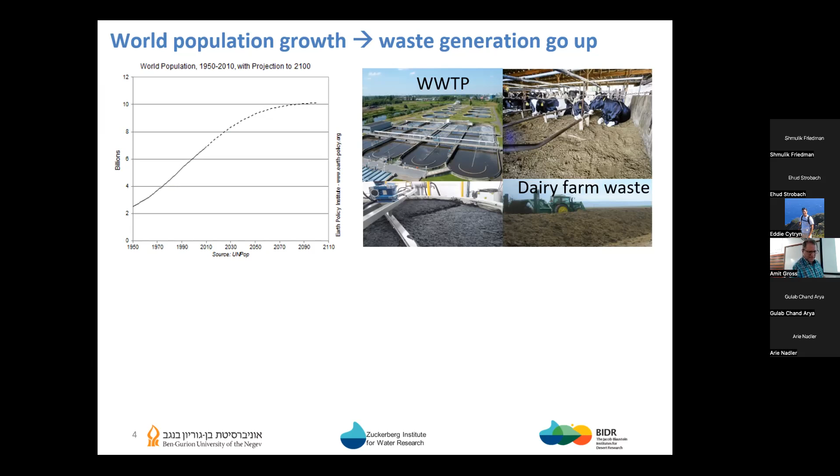So the issues of water and agriculture is obviously important, and here I should not really say too much of that. And again, as you know, but it's important for me to put a line, is to say that as population growth and agricultural activity is growing, the waste volumes and quantities are increasing dramatically over the years.

And in terms of, which is the focus of this talk, the organic, wet organic waste, sludges, you know, from cow sheds, chicken manures, and all of these kinds of agricultural wet organic waste. It's hard to say, but they have some general properties that we can define to some extent at least, and they surely need solutions in order to treat it well or to reuse it.

So these organic compounds are often with high moisture and poor dewaterability, and it often contains whether it's micropollutants or others, nutrients and so on. And while it's a waste, it obviously has at least a great potential for energy and nutrient recovery, and that's what I'm going to talk about.

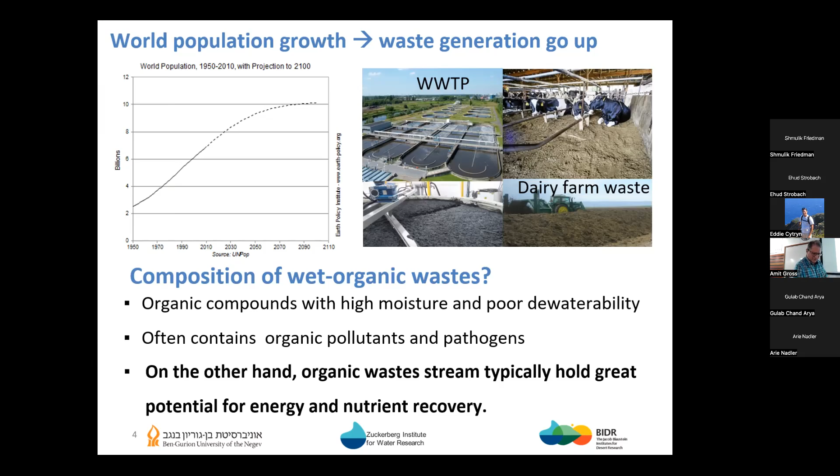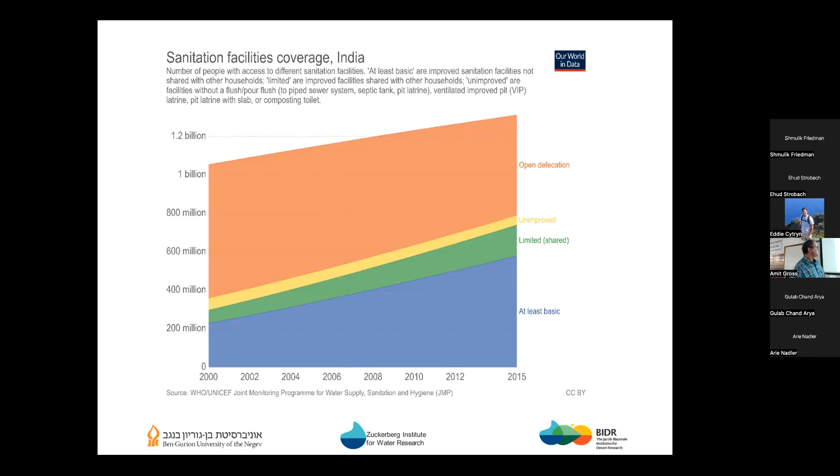So that's in terms of introduction. I'll have a little bit more, but towards the technology that we're using. I put this slide again for the same purpose, to say that there are billions of people who, it's not only agriculture, it's also people who are facing a sanitation issue, billions in the world. This is an example from India, and basically you can see that hundreds of millions still using open defecation. Anyway, to say that organic waste is a real issue, both in agriculture and in urban or rural environment in general. And that's the point I wanted to make.

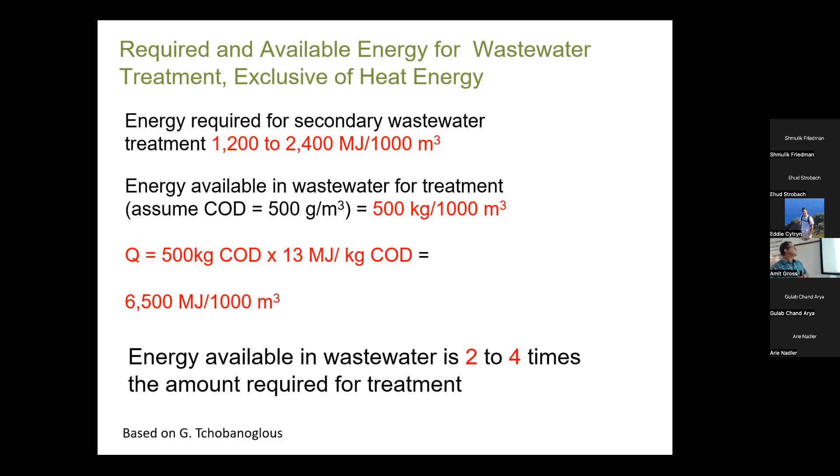The other thing which I think is really important, and probably few of you are familiar with that, is that there is a great potential, because today, in order to treat wastewater in general, we need about 1,200 to 2,000 and above, maybe 3,000 megajoules per 1,000 cubic meter, which is really pretty much the energy cost to treat wastewater, where in the wastewater itself, if I assume COD of 500 milligrams per liter or 500 grams per cubic meter, it's the same.

It means that we have like 500 kilos of COD or organic matter, for the sake of this talk, per 1,000 cubic meter, which means that every day we produce, if we took a 1,000 cubic meter wastewater treatment, it means that we produce 500 kilos of COD, and each kilo of COD equals potentially 13 megajoules of energy, which means that we have about 6,500 megajoules per 1,000 cubic meter, and in the waste, where it takes us about a third to treat it.

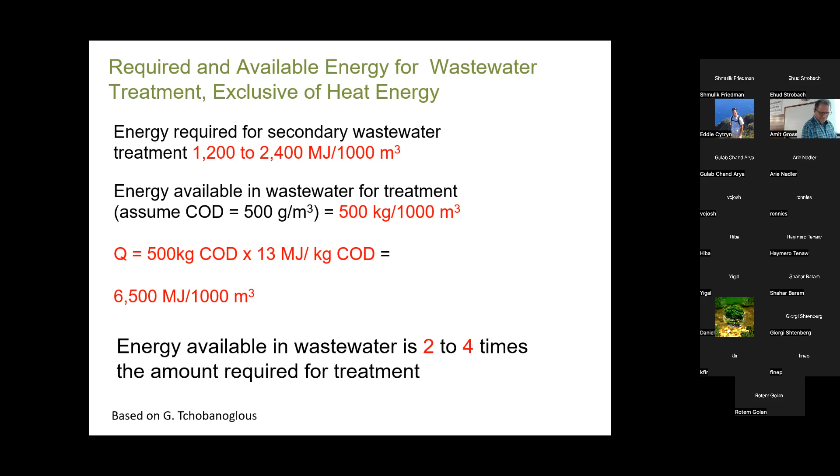So basically we have enough energy in our waste to treat it and to remain with a surplus, and to have excess energy for other purposes. And this resource is untapped, or it's not used for whatever reasons. I think people just didn't pay attention to it before, and today we all start to look at it and try to gain this back, and that's what it is all about.

And again, there are different treatments for sludge or wet organic waste.

I would say that probably anaerobic digestion is the most abundant one, where we anaerobically digest the waste and get biogas, and digest or lose some of the solids, sometimes 50%, sometimes 70 or 80%. It depends on the resource, but we still end up with leftovers, or effluents that are often contaminated. That's an issue with anaerobic digestion, although it's really abundant, specifically in decentralized or on-site solutions.

Then there is composting to sludge, and that's an aerobic process, and that also contains quite a lot of faults. I know people are working on it here, but Pinchas isn't here - I think he's on Zoom - but composting is better than not doing anything, but it's far from being an ideal solution.

And then people use pyrolysis, mainly dry pyrolysis to begin with. The issue there was that when you heat this waste for energy resources, you really gain energy, but in order to dry the water before you start pyrolyzing your organic matter, you lose so much energy just for evaporating the water, for drying the matrix, that the energy balance of many of these processes is negative. So we treat the waste, we gain energy, but it's less than what it cost us to do it.

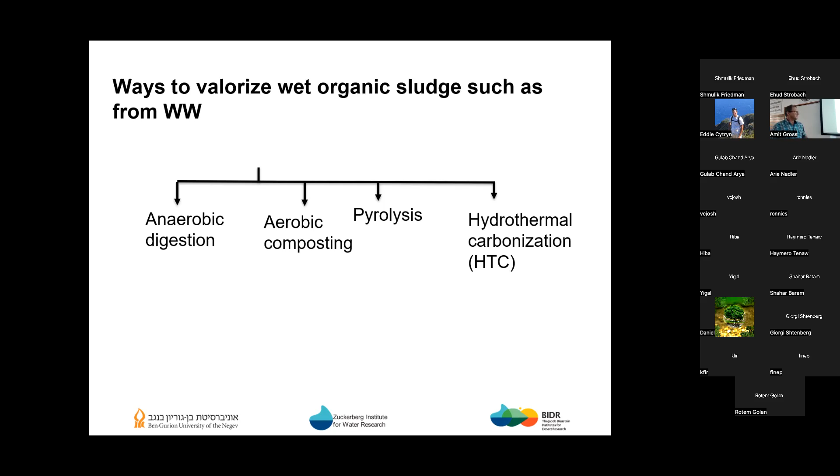It's a wet pyrolysis. What it is, is a thermochemical conversion of wet biomass. The temperature range is around 180 to 250 degrees, much lower than dry pyrolysis, which is hundreds - 500 degrees and above, up to 1200 degrees. So it takes much less energy to use.

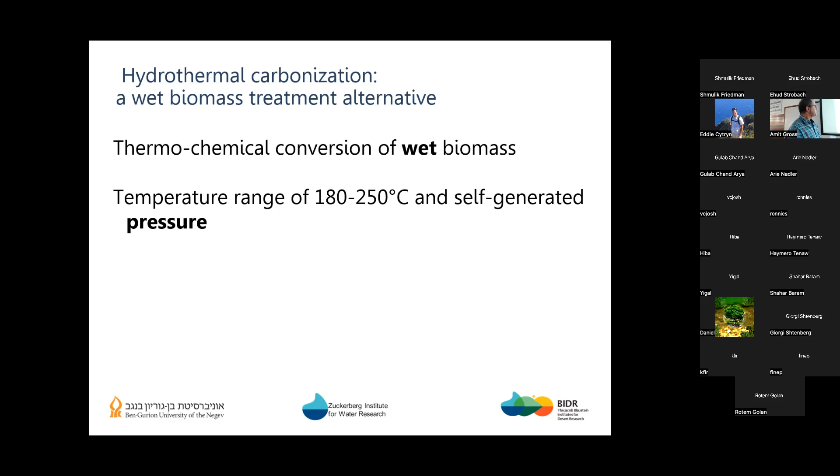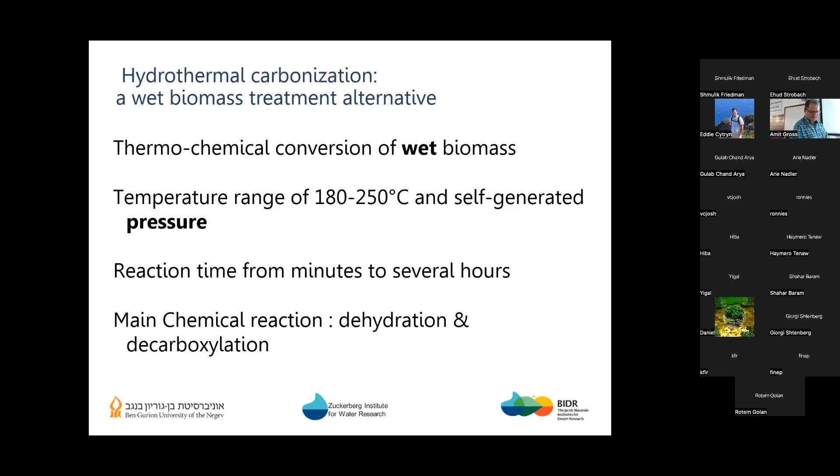And actually, we use the water as the active, reactive substrate. The reaction time is from minutes to several hours. And there are two main chemical reactions that occur there: dehydration and decarboxylation, and I'll say a few words about that.

What we're doing is we're taking our wet waste, introducing it into a pressure cooker, and heating it. That's all there is to this methodology. We heat it so that it gets to around 200 degrees, anywhere from 180 to 250 or so.

Then what happens is the water is considered to be at a subcritical temperature, subcritical water. The Kw goes up - at 200 degrees, the Kw of the water actually goes from 10 to the minus 14, to 10 to the minus 11 or so. That means we have much more hydrogen and hydroxyl ions, acidic and basic reactions in this solution.

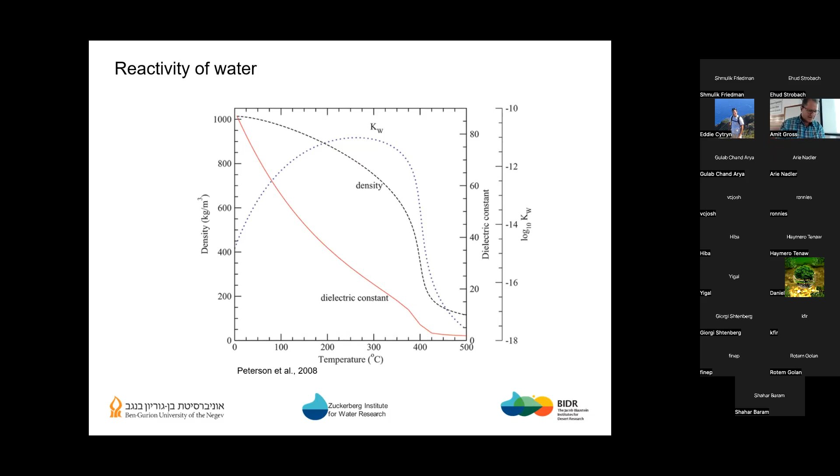We have a polarity drop. The dielectric constant goes from about 80, which is the normal water constant, to less than 40 at 200 degrees, which is like acetone. The water turns into a solvent - basically the water, from being like O and 2H, becomes almost like a solvent, and it attacks organic matter. The density goes down as well.

I'm not going to go into too much detail, but because of the reactivity of the water and basically the heat, temperature and pressure, we gain lots of organic matter transformations. Lignins are affected at higher temperature. Cellulose, above 200 degrees, starts to break down. Hemicellulose and carbohydrates at lower temperatures - remember, lower still means above 180 in our case - and proteins as well.

It goes through - part of it is aromatization, and part of it, as we said, decarboxylation, and some is repolymerized. Eventually we end up with some sort of solid component, which we term hydrochar, because it has char-like properties. It depends what we start with, because not every material gives the same product.

And we end up with a liquid phase, because we started wet. So the liquid phase is now sterile. Other things that happen there - some of the micropollutants are broken down and degraded completely. Pharmaceuticals are degraded completely, and so on.

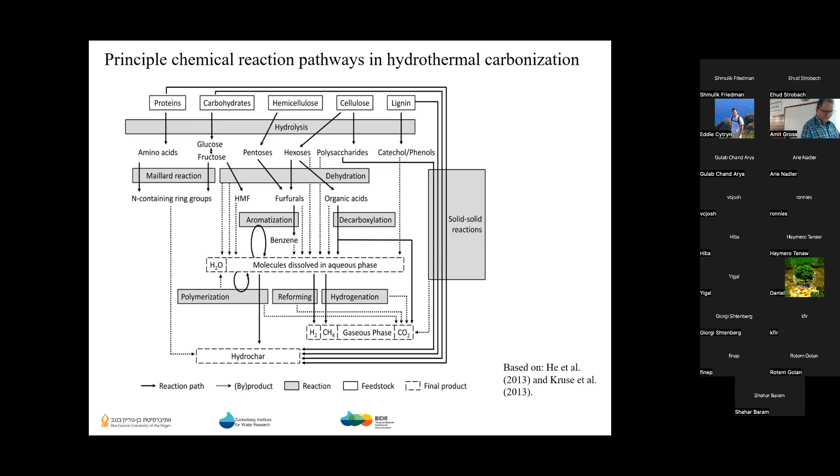We get a little bit of ammonia, depends what we start with, a little bit of sulfides, and so on. It's a complex process that a lot of work currently, or what we're trying to do is look at these cycles. I don't want to look at it too closely in this talk, but it's interesting. The other thing that we get sometimes is HMF and furfurals and some polyphenols. So if we want to use these compounds for agriculture, at times it can be inhibiting or so on.

Overall, just to put it in context, basically we're mimicking coal formation. The process mimics coal formation in nature, where wet organic waste is covered and under pressure and heat, and it takes 100,000 years, or a million years, and you get the real coal. We do that in a reactor in minutes.

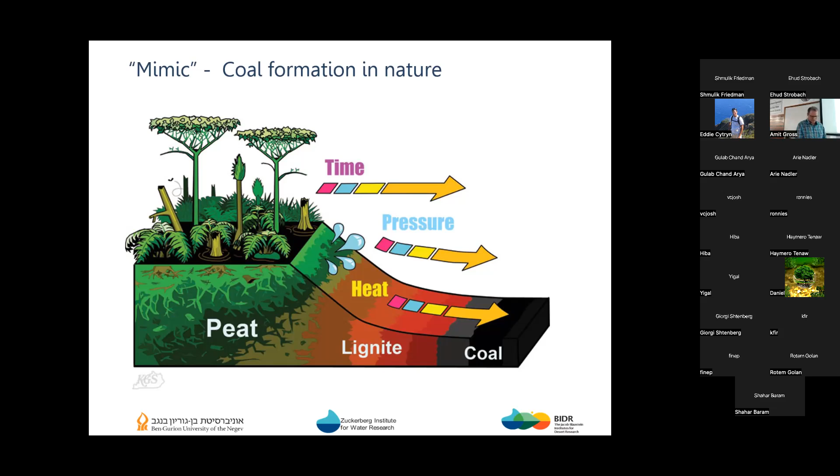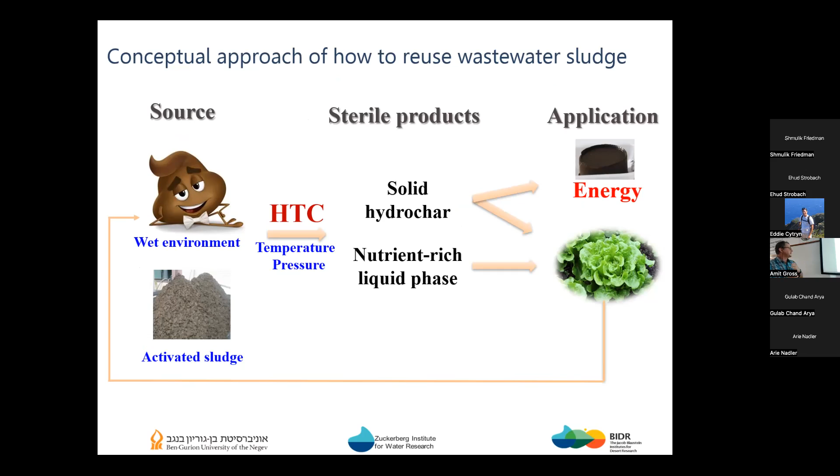Now, after spending enough time for introduction, I just want to show some of the things that we did, and the insights that we have from using this technology or practice for wet waste and sludge treatment, and discuss that. Basically, the experimental setup is fairly simple.

We take different sources of wet waste. And when I say wet waste, we really need to choose what is the solid to water ratio, or the solid liquid ratio in this case. We had quite a lot of research about that, because the more water you have, sometimes the process is better since you have more reactive substrate, but obviously you heat water, and if you heat water, you lose energy, same as with pyrolysis. So we found out, and I think we can go even better, that a 1 to 3 solid-liquid ratio would be the best.

It will give the best results in terms of optimizing between the energy you invest and the energy you recover. I think it can go even lower, depending on the resource. So you take wet waste, put it in this pressure cooker, this reactor, and heat it to whatever temperature you choose, anywhere in this range. You don't want to go higher, because then the water properties change, and you invest more energy than you may need. Then you end up with solid, with liquid, and with gas, which I'll ignore in this talk.

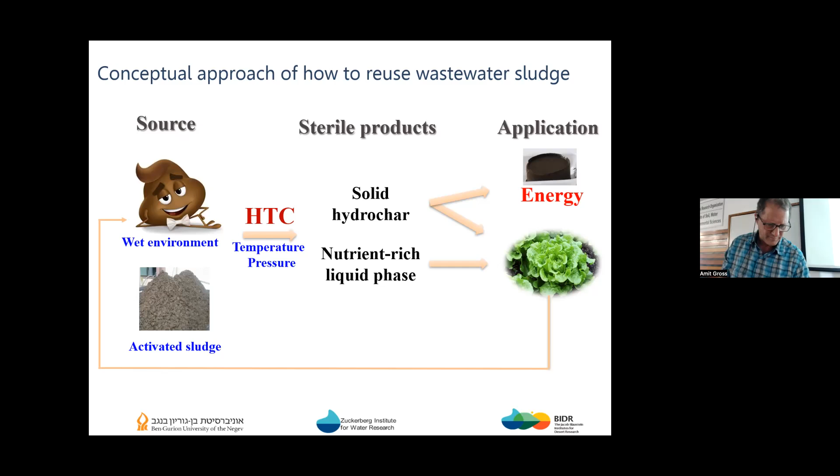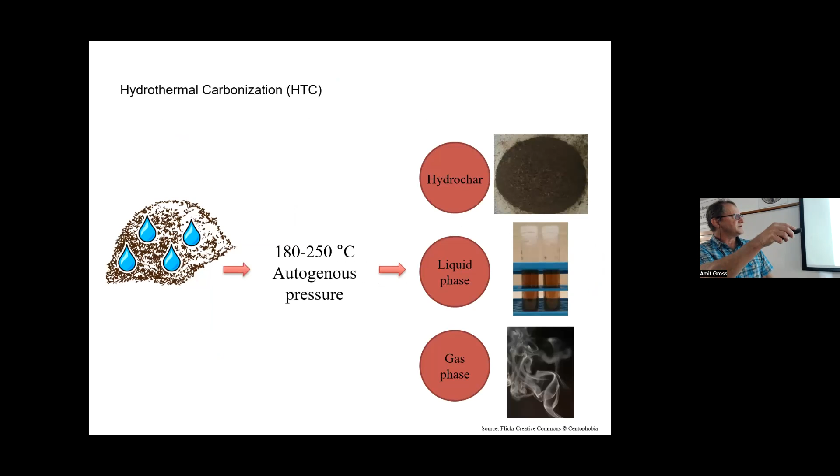And then the liquid - we tested the liquid for different usages. One of them was to grow plants on it as a liquid fertilizer. This is the experimental setup, and this is how this liquid looks - it's a bit brownish in color, while the hydrochar is black in color. And the gas, as I said, I'll ignore, although it's an interesting feature on its own.

Usually the temperatures that we used were around 180 degrees, 210 degrees, and 240 degrees, for different reaction times. We use these kinds of reactors, so we heat it in an oil bath basically, and after we got to the temperature inside the reactor, we let it stand for whatever minutes we decided upon, then took it out and quenched it in an ice bath - these are the reaction times.

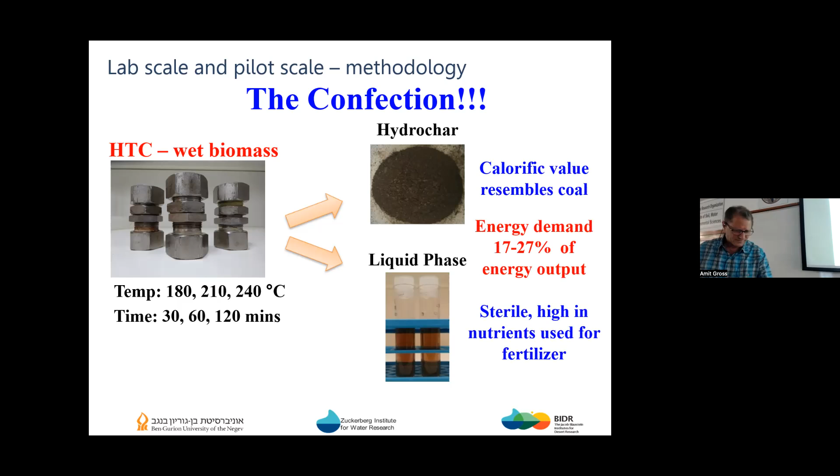Generally speaking, what we found is that the energy demand usually depends on what temperature and how much time, and would be anywhere between 17 to about 30% of the energy output. And we got this product. This is a larger pilot reactor to run some larger studies, but again, it's basically a pressure cooker.

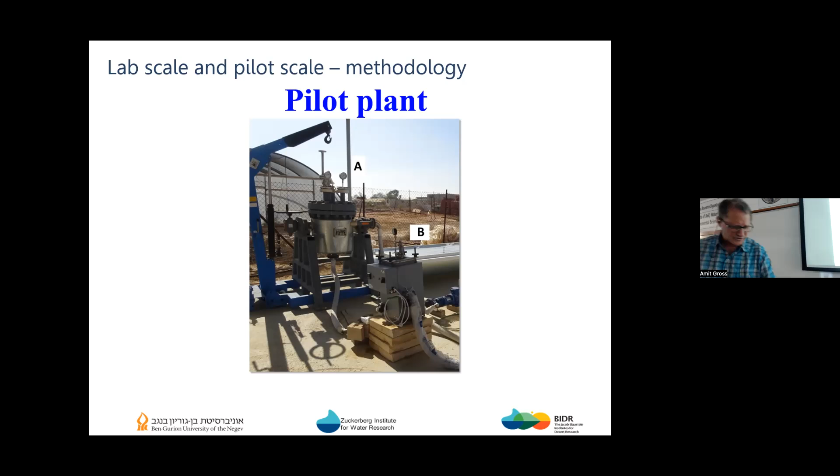Before we started, what we realized, and that was done by different people in the past, is that it's not only the temperature that's really important in the process, but the temperature and the time - the reaction time. They tried to put together an index they call severity of reaction, which was a function of the temperature and a function of time. You can see that the temperature affects more than the time, but still.

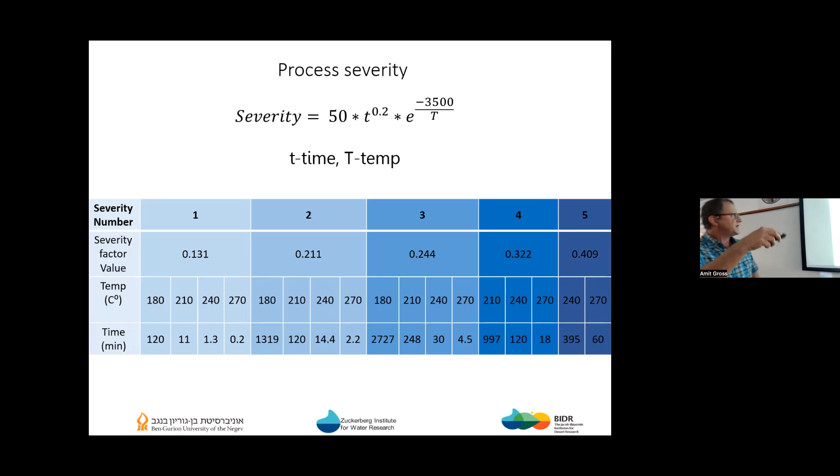What we did is we wanted to see if this severity factor can change - when we heat it to 180 for 30 minutes, what it would be, or how we can compare it to 210 in an hour. We used this severity equation and tested different severities, composed of different combinations of different temperatures and different times. So in order to get the same severity, if we heat something at 180 degrees, we need 120 minutes, whereas if we use 270 degrees, we need only 0.2 minutes, and so on. So we had 5 of these, and we looked at the effect of severity.

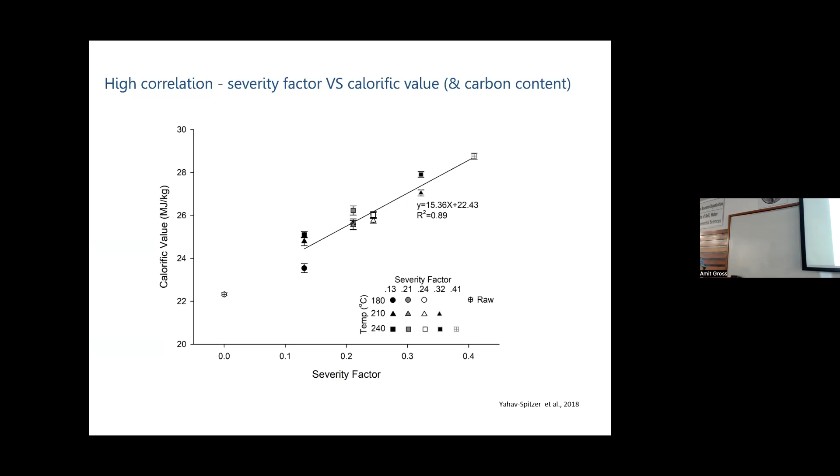What we found out, if we look at the severity factor - and this is just a representative parameter, in this case the calorific value, how much calories we get in our coal or hydrochar - other than this outlier, you see all this group has the same severity, done by different temperature and time combinations. It's the same severity, and it doesn't matter - it's not the temperature, it's not the time, it's the combination of temperature and time that gives the properties of the hydrochar.

Why is it important? Because we can now actually predict what is going to happen if we use severity. And in practice, why it is important: heating something to 180 degrees is a very different pressure than heating something to 270 degrees. It's different materials that we need to use, the reactor costs differently, and so on. So you have to optimize between time and temperature and what you have.

What happens when we do that? Then we get decarboxylation and dehydration mainly. So what often changes is the oxygen to carbon ratio and the hydrogen to carbon ratio.

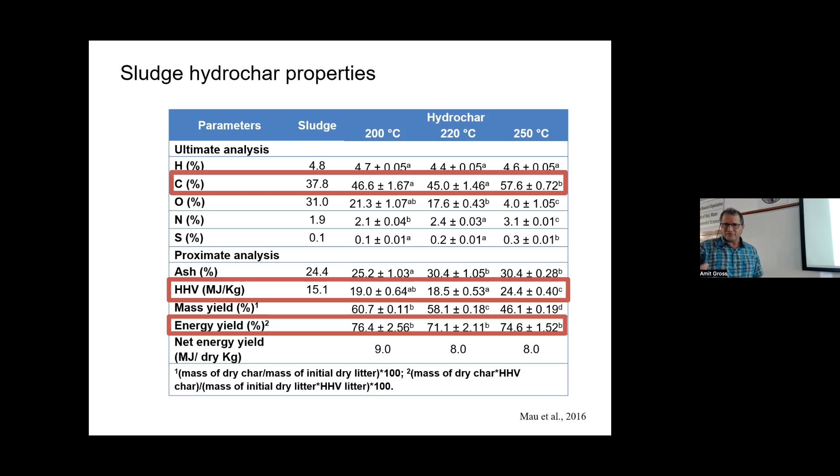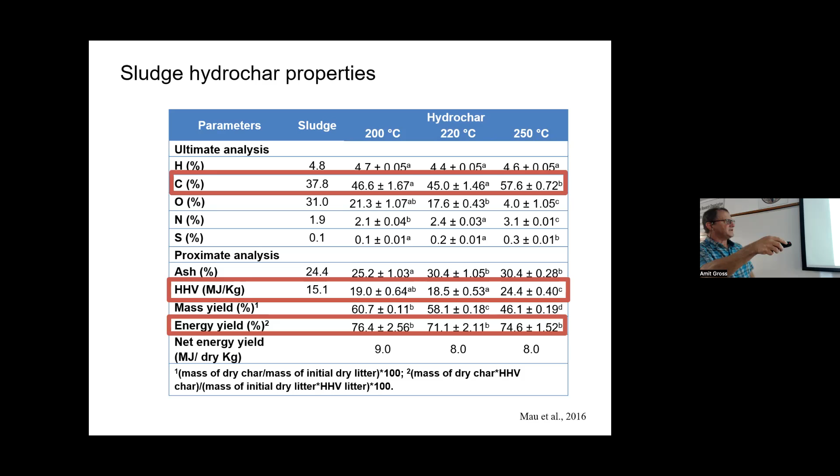We also see there is some percent of ash in this biomass, and this is really important because if the substrate contains a lot of ash - if it's a digested substrate, for example - then the ash content is sometimes higher, and the energy content here doesn't get high enough, so you cannot use it for energy purposes.

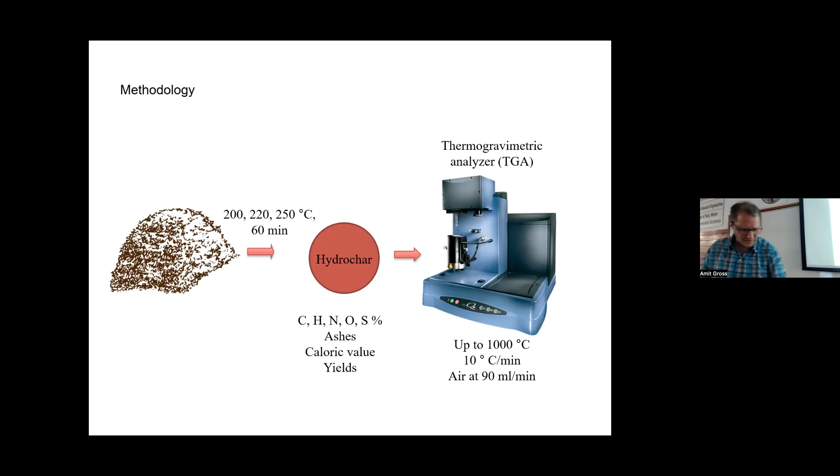Then what we did is look at the combustion properties of this hydrochar. We said, okay, we want to use it as energy - let's see that it can actually be used as energy, because often biochars and such contain energy but are not very efficient in terms of energy use.

I'm not going to go too deeply into the details, but you can see fairly similar combustion properties of hydrochar, which is the red one, of pyrochar, which is biochar done by dry pyrolysis, and subbituminous coal from a mine - this graph here. Basically they're all the same. So the idea is that it can be replaced as a substrate directly into current facilities, and you do not need to build any generators or power plants specific to this carbon.

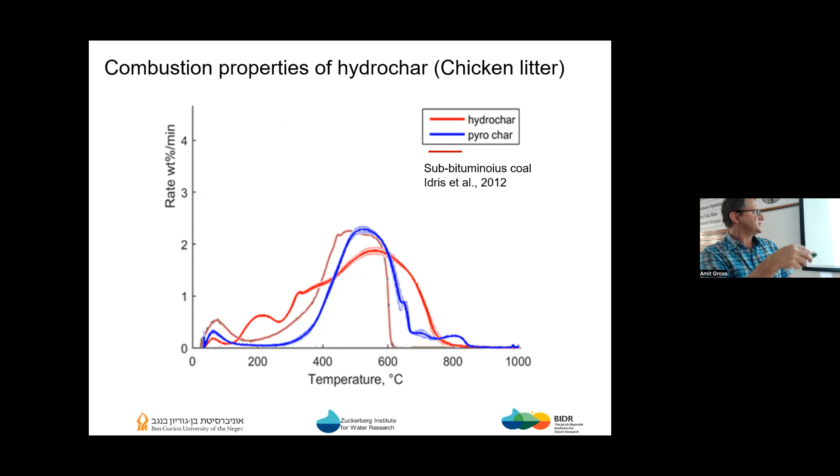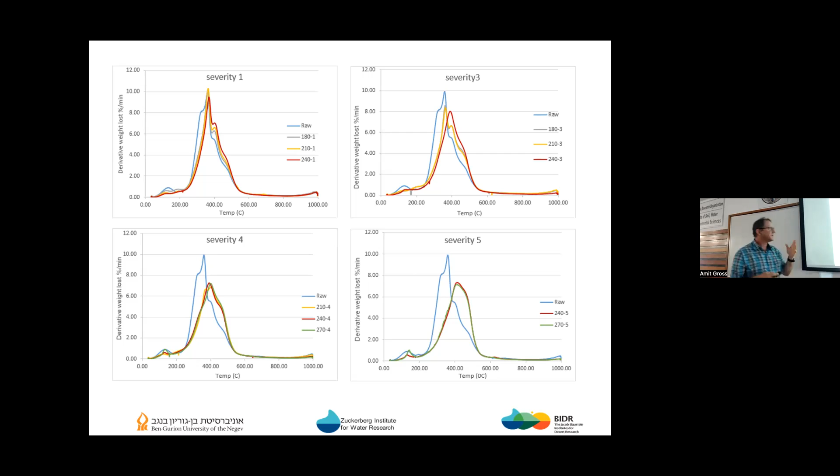We also demonstrated the same combustion properties. What I wanted to show is that we can predict, if we prepare the char at a certain severity, what the combustion property would be, because it changes according to the severity used in preparation. This gives us a tool to optimize between combustion properties, if we want to use this as an energy source, and the liquid properties that remain if we want to use it as a liquid fertilizer. That's what was done here.

If we look at this char in terms of properties, we find these are very hydrophobic, char-like materials. The contact angle is typically more than 70 degrees, sometimes even higher. This changes the soil properties if it is amended to soil rather than used as an energy source.

Why would we like to use it as soil amendment? First, it's another usage. Secondly, as I said, not all char has high energy properties, because it depends on the amount of ash that we start with.

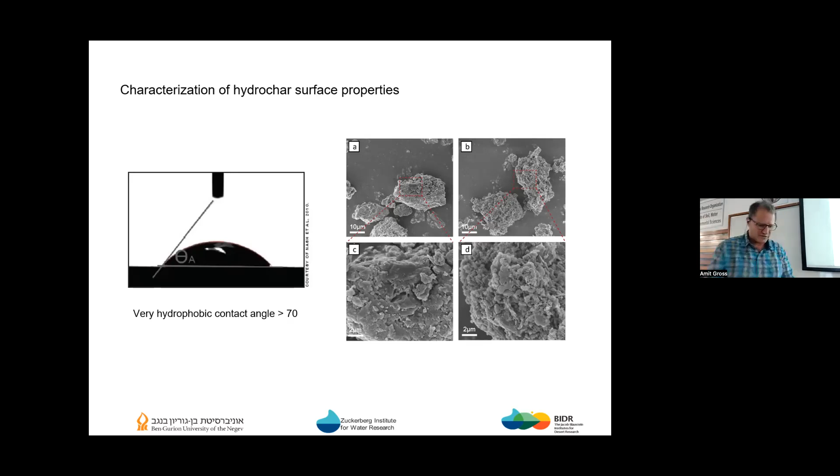So in this bit, I would just show a few studies that we did on how we can use the hydrochar as a soil amendment rather than an energy source. What we did is basically we applied it at 10 to 40 tons per hectare as a soil amendment, and we grew plants.

Typically, I like to grow lettuce because it's a good model plant, not because we eat it. It's a good model plant - it's sensitive, with a short growth period of 30 to 40 days, and it's not bolting, or we finish the experiments before it bolts.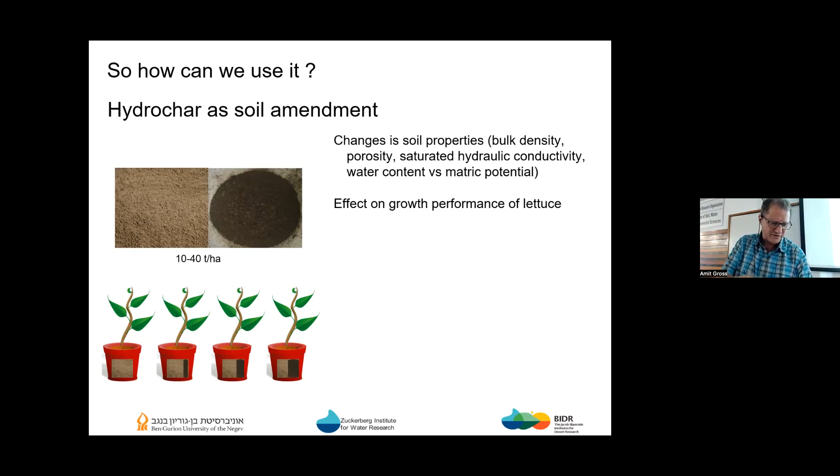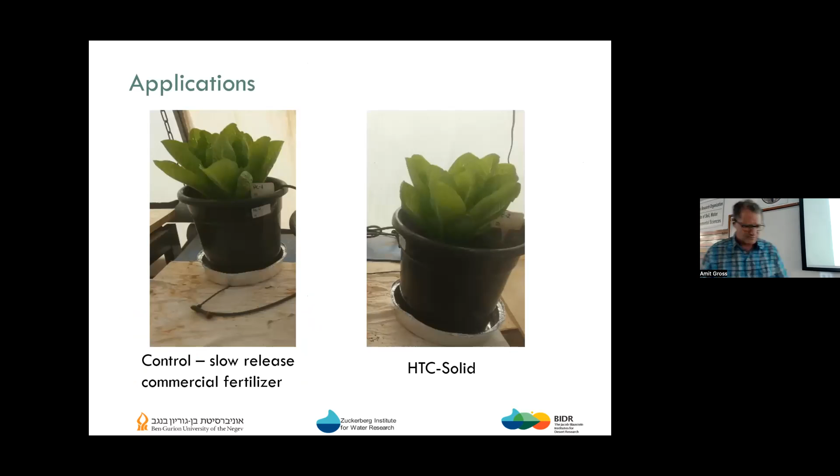So it's only green leaves. When we compared slow release fertilizer to carbonized soil - this HTC, or hydrothermal carbonization, hydrochar soil amendment - we see pretty much, by eye, the same results. And believe me, it came pretty much the same, which was surprising, I must say.

We also looked at it as an absorbent material. So we activated this hydrochar with a Fenton reaction - we introduced iron and H2O2 and mixed it together.

We had activated it with functional groups attached on it, and then we used the char as an absorbent for ammonia. What we did is we activated it and introduced it into wastewater.

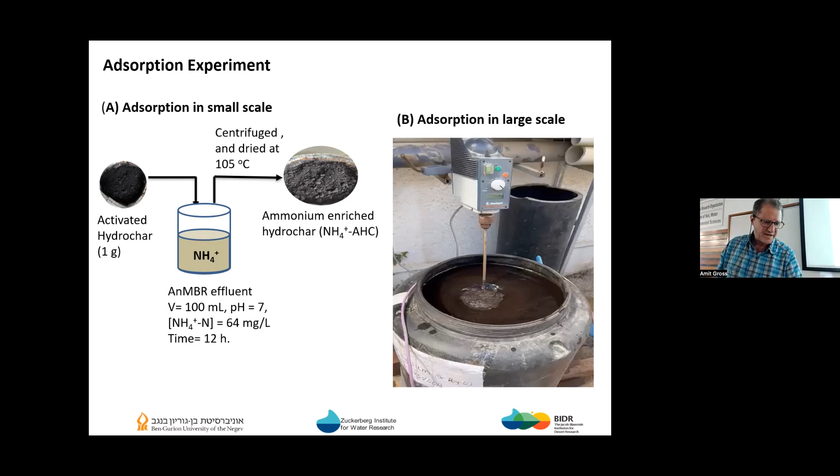What happened is that the feed wastewater concentration had about 60 milligrams per liter of ammonia. After introducing hydrochar, it got down to about 40, then we took it out, introduced a new batch of hydrochar, and reduced it to about 30 milligrams per liter. That's when we used raw hydrochar, not the activated one.

When we used the activated hydrochar, it had a better absorbent quality. The water started at about 60, went down in the first round to about 35 milligrams per liter, and the second batch went down to less than 20, around 12 or so.

Why is it important? Because that was, for example, the ministry regulation by INBAR on whether water can be reused or sent to the environment. So that was the deal there.

So we demonstrated, to a certain extent, that it can be used as an absorbent material for ammonia. To be honest, I would say I don't know if that's all true, because ammonia was reduced, but I don't know how much TOC it introduced, and it also introduced some color to the water. So if we started with something transparent, now we had something brownish.

Then we used it as soil amendment. You see here the sand - when the sand is added with this char, it's more black. These are the lettuce, and this sampler is for greenhouse gas emission. We followed the growth with different treatments.

I don't want to bother you with the details because I don't think it's important, but the negative control, when we had very little nutrient solution given to these lettuces - something like 10 or 15 milligrams per liter as a liquid fertilizer - that's what it grew.

When we had the hydrochar, the activated hydrochar, urea in hydrochar, or just urea as a positive control, we see that it all grew, some better than others - that just came two days ago from the experiment so I haven't analyzed it well yet. But what we notice is that there are no inhibiting features that we expected from the sludge, and that was surprising and really interesting, and it coincides with another study we have on chicken manure.

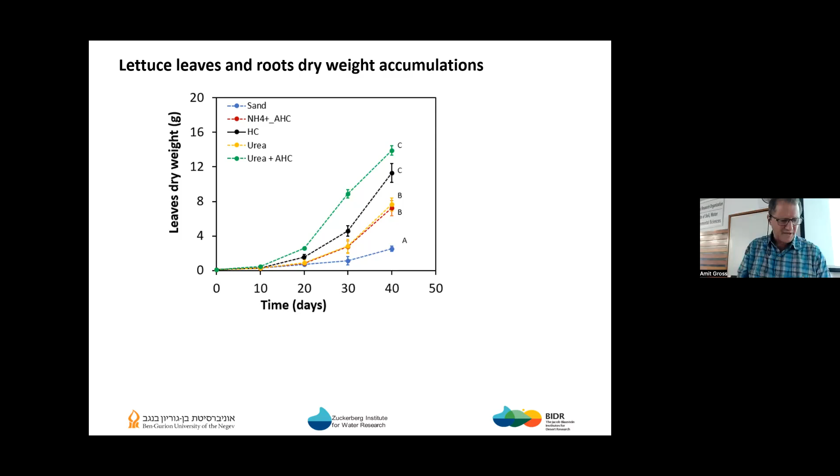When we use human excretion, you'll see in a minute, we do have some inhibition. So the soil amendment using hydrochar resulted in significantly higher yield - it definitely can be used as some sort of soil amendment.

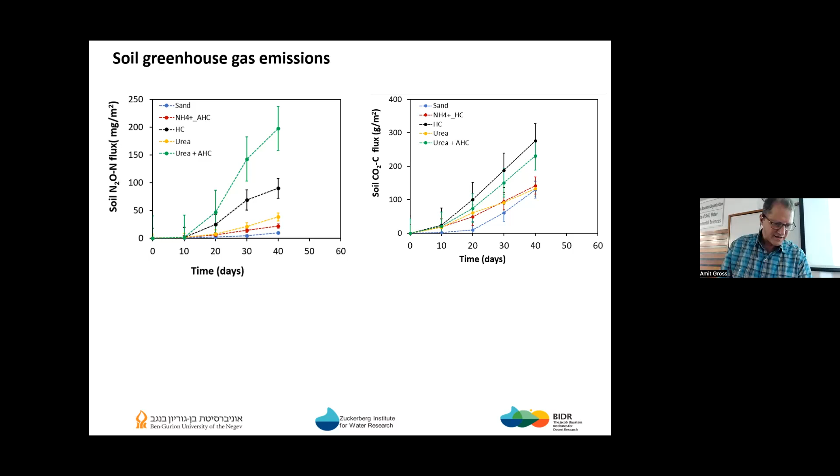And this is for CO2, and we got pretty much the same trends, obviously with different numbers. But there's definitely microbial activity and soil respiration in the soil, which lets us know that it's not toxic by any means.

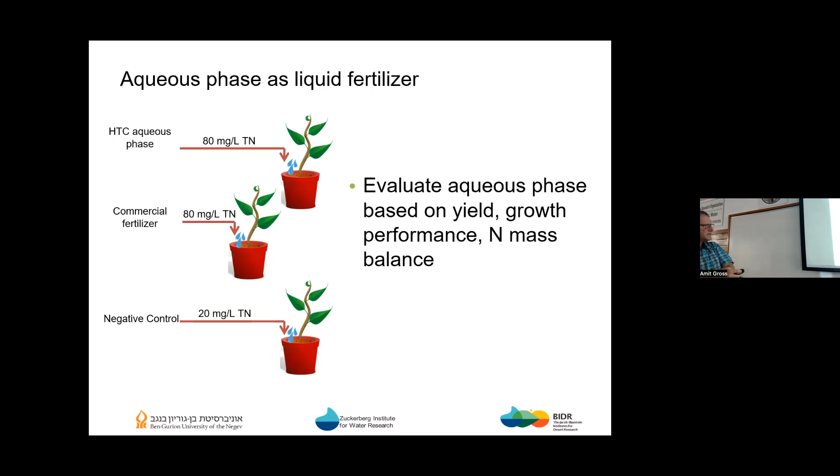The other thing considered a burden with this usage is the liquid phase - what do you do with that? We did the same thing: we reduced the liquid phase, which typically contained 5,000 to 6,000 milligrams per liter of nitrogen, down to about 80 milligrams per liter of nitrogen, which is commonly used for fertilization.

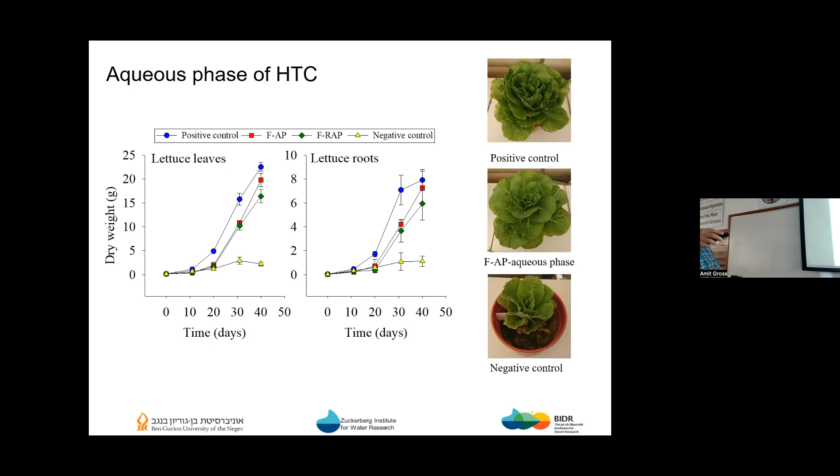We had the negative control and followed plant growth. The negative control, that's dry weight of the lettuce, was very little, and then the aqueous phase amended liquid grew really well - that's compared to the positive control using a commercial fertilizer. So you can see it grows well and can substitute a commercial fertilizer, at least to a certain extent.

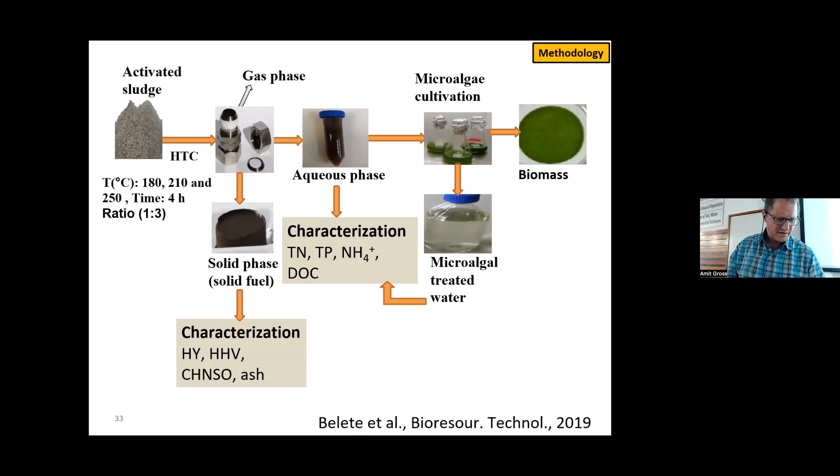The same thing was done with algae - not only lettuce. We used the aqueous phase as a fertilizer and got really nice biomass growth. The nice thing about algae is that if you start with this sludge aqueous phase amendment, which is very brownish, and grow algae, the water turns green. But once you harvest the algae, it also takes the color out of the solution.

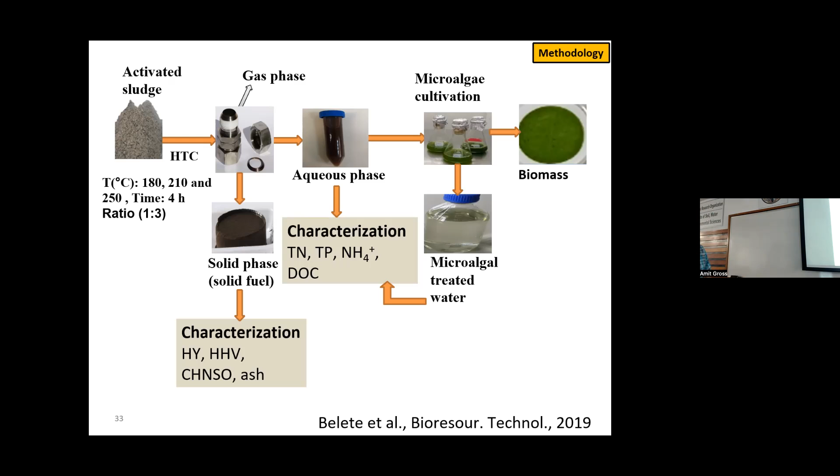It basically ends up being clean water, which means we can use the aqueous phase as a fertilizer, harvest the algae, and then use the clean water for whatever purpose we want - obviously not drinking, but for other reuse, washing, or irrigation, now with very little or no phosphorus and nitrogen in it. Okay, I hope that's clear.

So that's the biomass - here is a Chlorella species and another species of algae, and that was using the HTC aqueous phase as a fertilizer, showing growth. And that's MBG11, basically a commercial nutrient solution as the growth factor or fertilizer. We can see the same type of growth whether you use the aqueous phase or the commercial nutrient, and you can see how the color changed from before to after treatment with the algae.

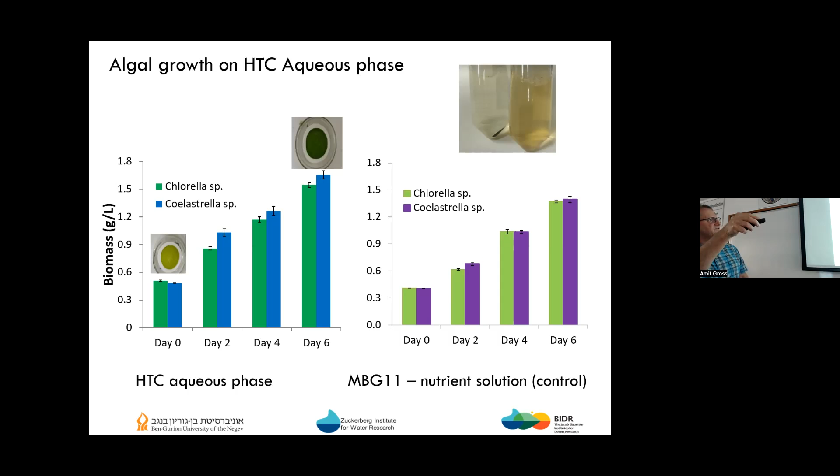And here I want to, for a couple of minutes, just say that it's not always, as my daughter says, 'parparim vefeyot' - butterflies and flowers, not all roses.

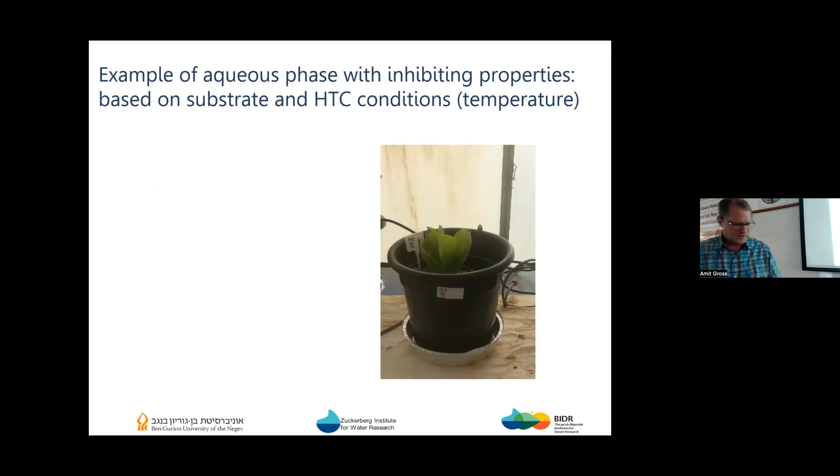There are some inhibiting properties, at least with some substrates, and that's human excretion. You can see that the plant didn't grow well after irrigation with aqueous phase at 80 milligrams per liter - it was lower than the negative control. We can see the same thing if we put this aqueous phase on a plate with bacteria - we see this inhibiting ring, and we're following that a little more closely now.

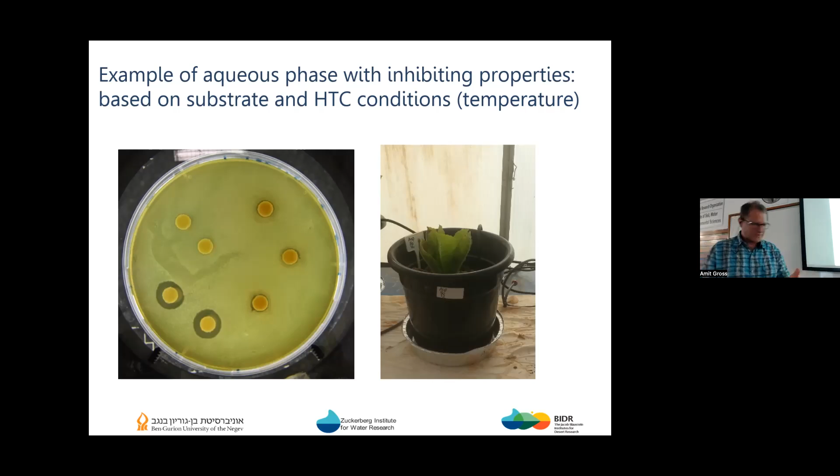But it means we need to know what we're doing. Not only that - I think Roy at Neve Yaar is using these kinds of things now to actually spray plants in order to treat different plant diseases. So it can also be used this way, but we need to know what we're doing - it's not always straightforward.

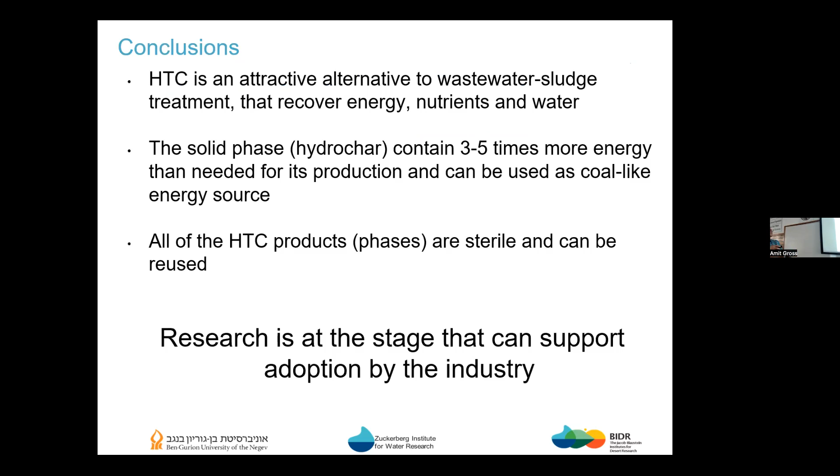To summarize this whole thing, I would say that hydrothermal carbonization is an attractive alternative to wastewater sludge treatment, and it can recover energy, nutrients, and water. I think I demonstrated that, at least I hope. The solid phase contains about 3 to 5 times more energy than needed for its production, so it's actually a net positive energy balance, which is unique, I think, in terms of waste treatment.

All the products are sterile and can be reused, one way or another, not always straightforward.

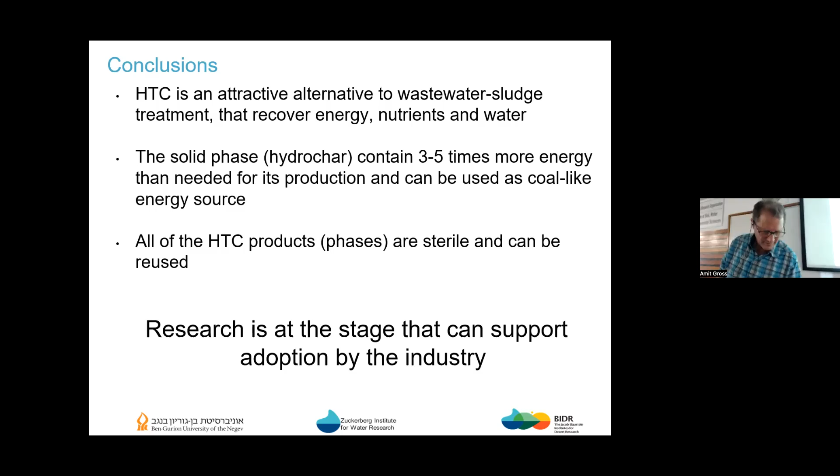I think that at the moment, the research is at a stage that it's really ready to go to larger pilot scale type experiments rather than stay in the lab. With that, there's tons of people working, not just me doing the talking. There are many of my students, different collaborators from Germany when we had this BMBF, Roy Posmanik and Bernstein—he's from the Zuckerberg Institute, and Roy is from Neve Yaar—and Ilya Gelfand, who looked at the greenhouse gas emissions and helped us with that, plus more students, technicians, and lots of funding agencies. Yeah, that's it. Thanks.

Questions? For large scale treatment plants, do you think it can really be better, let's say, than anaerobic digestion like the Shafdan? Because it looks like maybe for small scale it can work, but I'll say two things. First, I can say yes, I can say no, but the truth is I have no clue.

It's something that has to be done economically, economic feasibility and so on. The evidence that it can be—there is the first, I just read an article about PA, Pennsylvania, in the US, where the first full-scale HTC facility in a wastewater treatment plant was built, and they're happy about it, and it's working. I know there is one company in Germany, not for wastewater, for other things, and there is one company in Spain for organic waste. So it's coming there, it's like mushrooms now. So yes, I think it has the potential. All our calculations show that it is possible. Whether it's applicable at large scale, that's beyond me, but I do think it is possible.